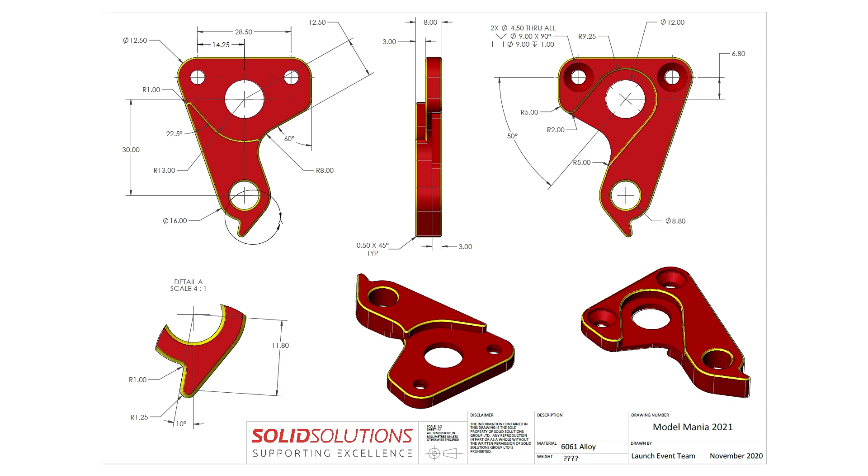So let's get going and take a look at how we can approach this model. The first thing we need to do is create a new part, choose a plane to work on and open up a new sketch.

Rather than sketching each line individually, you can use the slot tool to define the top portion of the model, followed by a centre line running down from the middle of the slot. This allows us to easily position the circular cutouts and the bottom circular edge of the profile.

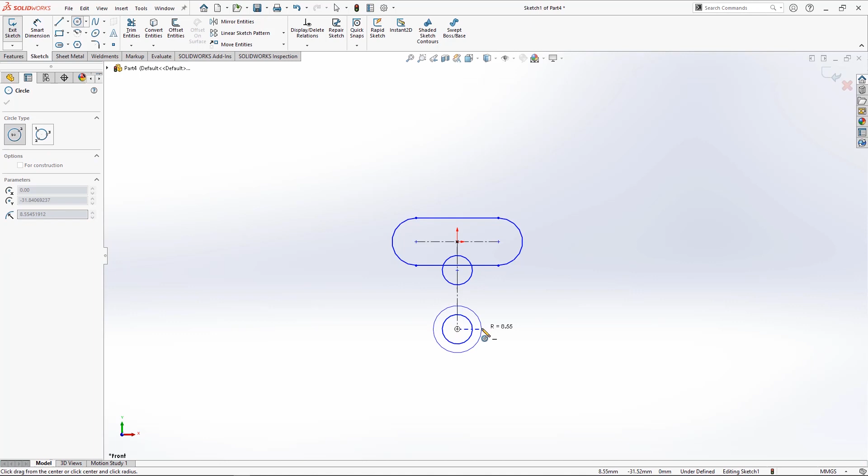Mouse gestures will allow us to pick our sketch tools quicker, such as the line tool, which we can use here to add in tangent lines between the slot and the lower circle.

Add in some final straight lines to the right hand side and then trim these back. We also need a parallel relationship between the two tangent lines protruding from the lower circular edge.

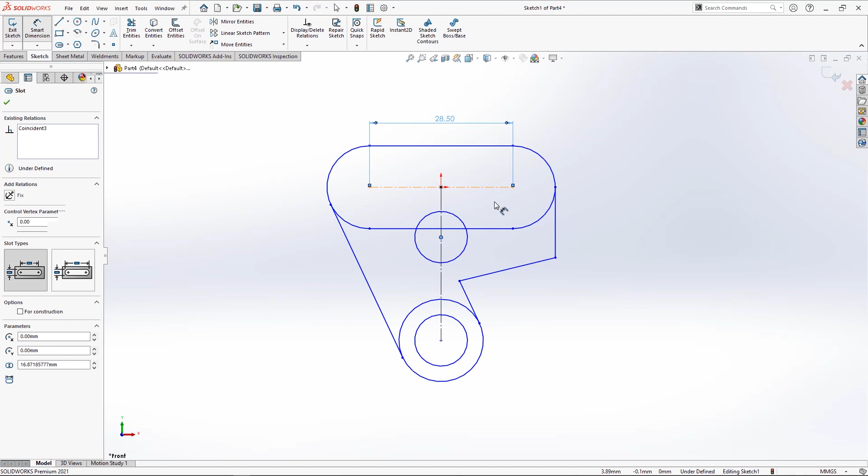Using the mouse gestures again to prompt the Smart Dimension tool this time, we can begin defining some key dimensions, such as the slot width, central height and all other key dimensions, such as the hole size and angles.

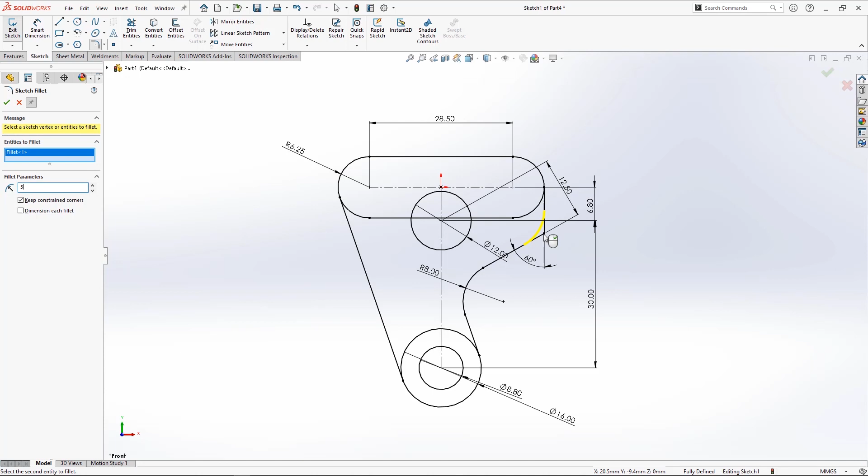Once these dimensions are in, add the 5mm and 8mm radiuses using the Sketch Fillet tool. Lastly, add in the lower strut detail and dimensions.

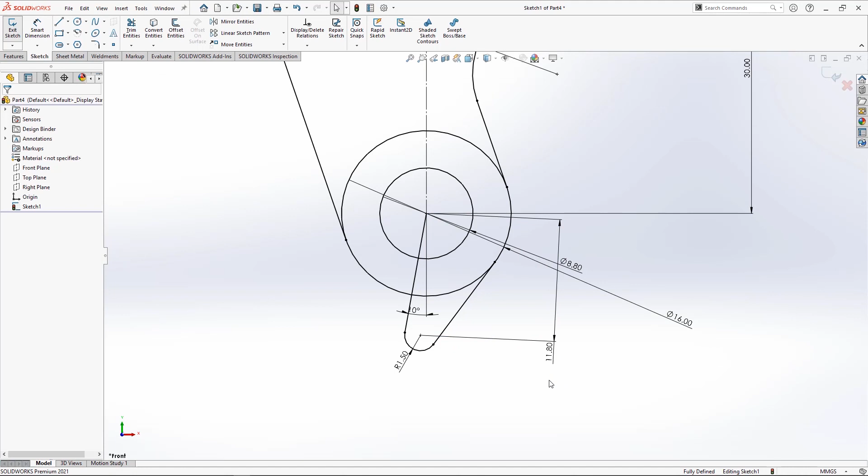Trimming this sketch back would take time, so instead hold Ctrl and Alt and enter the Selected Contours command and pre-select the areas of interest. Once highlighted, the Extrude Boss Base command appears and the feature can be directly entered. Extrude this to 8mm.

Next to the cutouts. For the front cut, all that is needed is an arc and a line. The Center Arc tool can be used to snap to the centre of the existing hole, and then the L key used to prompt the Sketch Line tool.

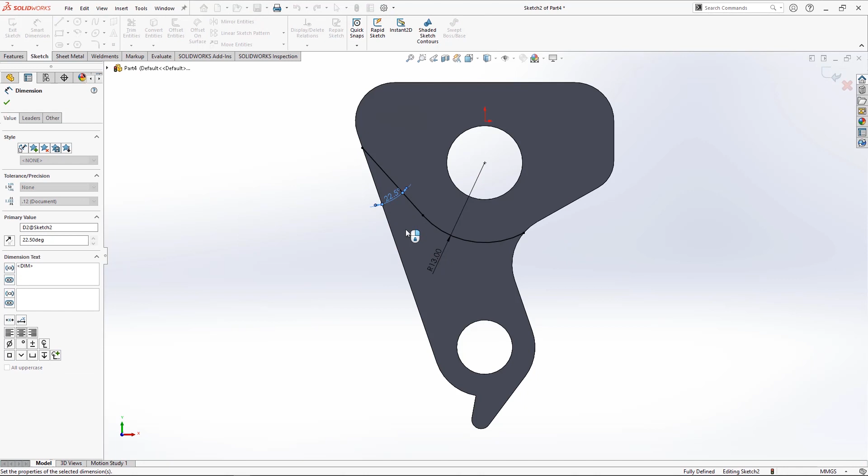The last thing is to then create the extrude cut to a depth of 3mm.

Spin the model round to the opposite side, create a new sketch and pick the slot tool, snapping to both the lower angled edge of the existing model and the centre of the upper hole.

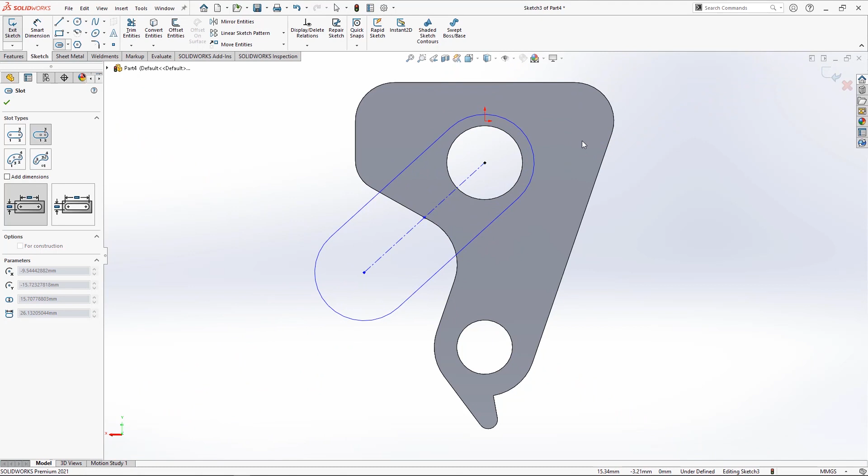Then use the mouse gestures to prompt the Smart Dimension tool in order to add in the radius and the angle.

Whilst we're still looking at the model from this angle, we can add in the countersunk holes. The fastest way to achieve this is by using the Hole Wizard command. If the custom sizing option is chosen, our required size can be added, and even the extra counterbore head clearance can be added too.

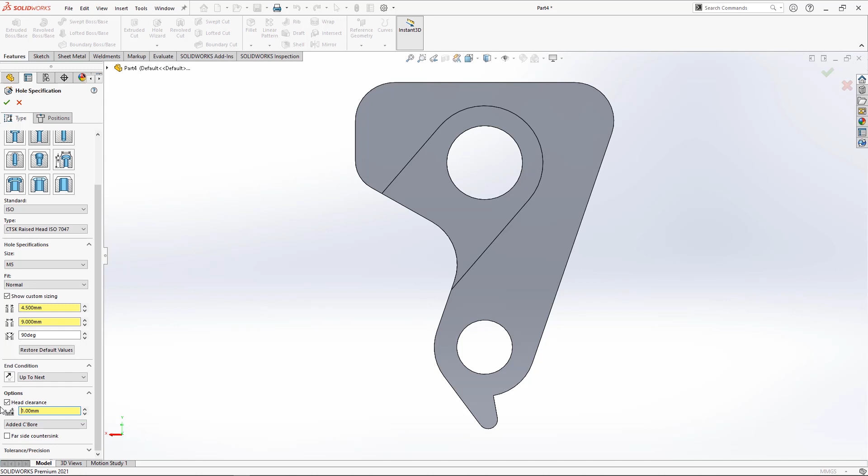Hover over the arc of the upper corners to wake up the centre points and snap in both points.

There are a selection of fillet sizes that are needed: 1mm, 2mm and 5mm, and these can all be added as part of a single fillet feature using the multiple radius option.

Add the chamfers in to all edges specified on the drawing at 45 degrees and 0.5 of a millimetre.

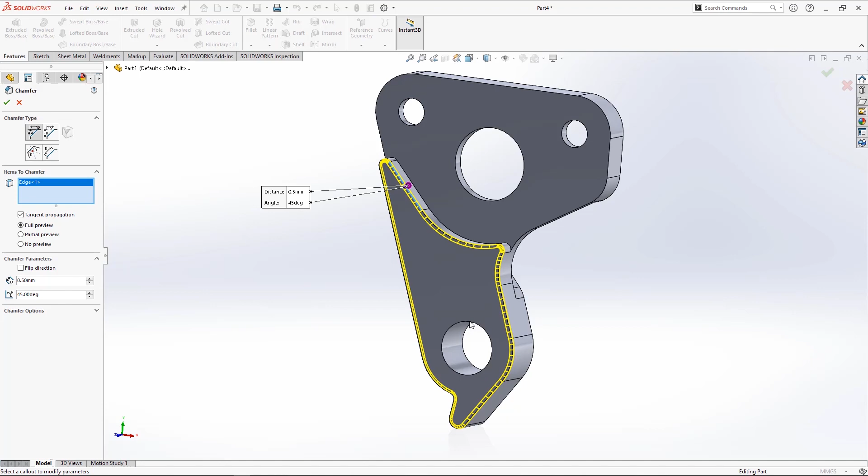And then finally, make sure that the material is set to 6061 alloy, which can be searched for from the materials search dialog.

The end result should then be a part file with a weight of 15.41 grams.